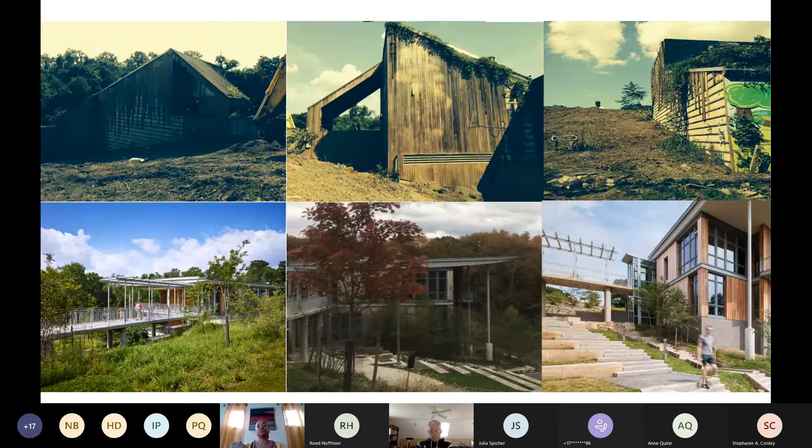One of the things we were able to do was maintain the original footprint of the building. Going back to that imperative of site, staying within the smallest footprint you're able to achieve is one of those things, and we were able to do that. So the building sits on the same original footprint, but we've actually increased the amount of space, because instead of spreading out, we have 3 floors as opposed to the original 2 floors that were on that site.

Another piece of our site is the From Slavery to Freedom Garden. The Living Building Challenge is a regenerative design process, and it was an opportunity for us to put a regeneratively designed garden within our space.

We took that a step further by not just thinking about the ecological design principles, but how people would use the space and the equitable use of the space. In this photo you can see children interacting with the garden, and that raised garden bed in the center uses a soilless media. It's an opportunity for us to teach children about how plants grow, and more importantly, about sustainable materials and why we'd choose to use them within our site.

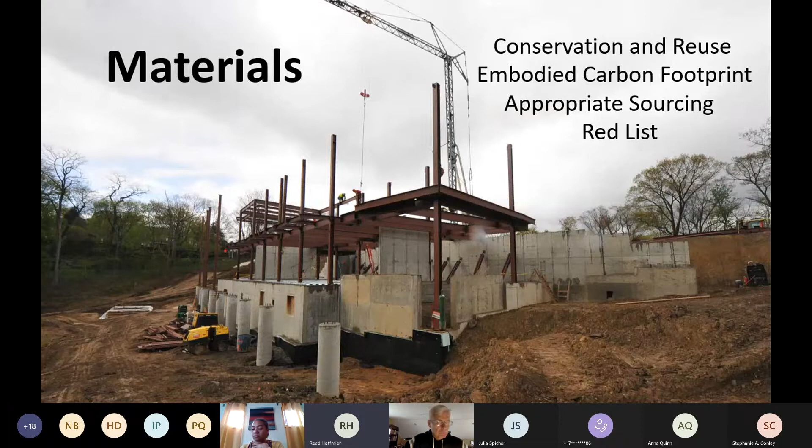Thanks, Camilla. I'll talk about the materials petal. It has a few imperatives, and it's definitely one of the less glamorous but very important petals here. First would be conservation and reuse.

Basically, boiled down, in the demolition and construction process we tried as much as possible to avoid putting materials in landfills. I'm going to go pretty quickly here since we'll have a Q&A at the end, so remember any questions you might have.

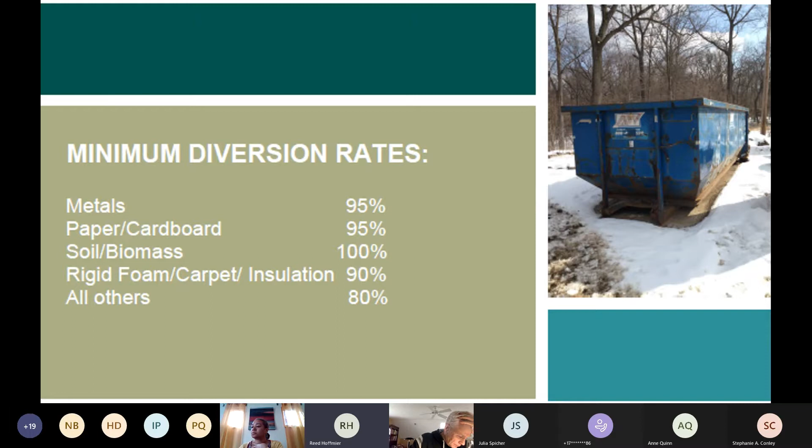But embodied carbon footprint—as much as we like to say there's minimal impact, obviously you can't build anything without having a carbon impact. So to offset that, we were required to track the carbon footprint of our construction process and purchase carbon offsets.

Another imperative is the red list. If you ask anybody involved in the design and construction process, most will probably tell you this was the most difficult part of the entire thing. Basically, we have a list of about 430 chemical compounds that are not allowed to be in any of the materials we use, from drywall to light plate switch covers—just everything.

It basically boils down to groups like formaldehyde, PVC, and VOCs. The challenge was going to all the manufacturers of every product we used and having them vet the product to confirm it contains none of these chemical compounds. What we learned in the process is that material suppliers are not always willing or able to share this information.

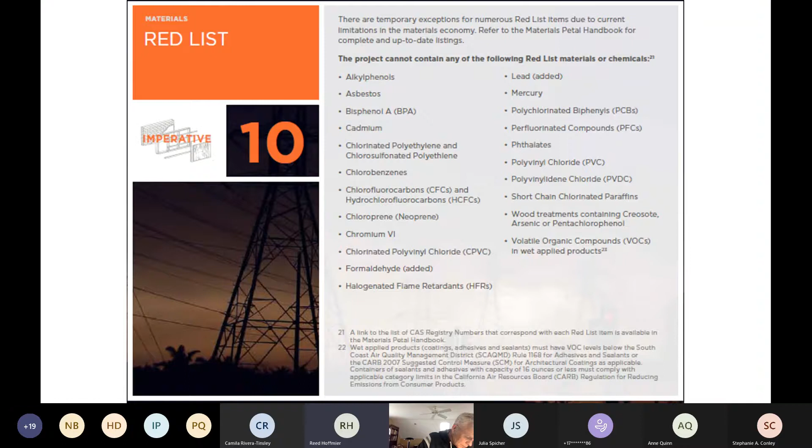It's really difficult to do, but in a way that's how we were moving the needle a little bit—looking for transparency in the products industry. You can see the difference between when we started this process and current living buildings coming through now: suppliers are more and more inclined to have this information ready to go, because there's a market for green materials. That's pretty exciting.

Another thing we found vetting those materials: natural materials are obviously going to be the easiest. Stone, concrete, untreated wood, things like that are fairly sustainable in a relative sense.

The last imperative within the materials petal is responsible sourcing. First, you have to ensure your products are being sourced responsibly—for example, lumber used has to be FSC certified. The other thing is sourcing distance: the heavier the material, the closer it has to be to the job site. For example, the stone we used on site was quarried outside of Butler, whereas some specialized electronic components may have come from Europe.

Okay, so now we're on to the equity petal. Camilla can tell us about this.

You might be muted, Camilla.

Part of the equity imperative demands that we take a look at democracy and social justice. We also pay attention to the scale of the place, a human scale and a humane place.

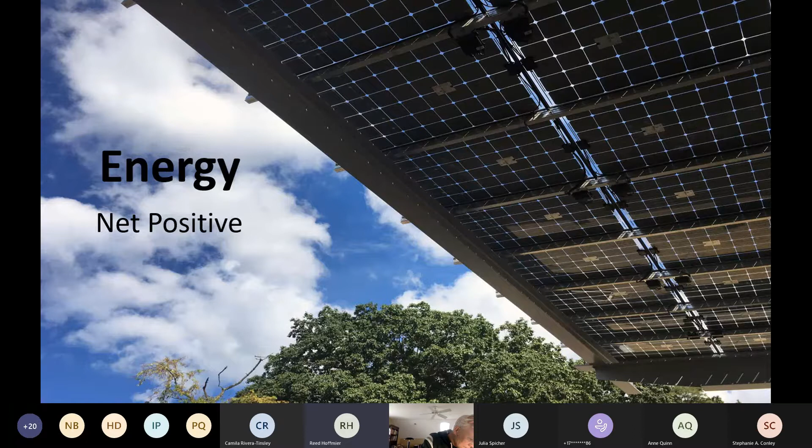All right, so the energy petal—this is a big one. There's a lot of metrics and data collection involved, even though it only has one imperative: we have to be net positive in on-site clean energy production, meaning we create more clean energy than we use.

Here's an overview of our site. On the left side, we have solar panels covering our parking lot, creating clean energy. We use the energy for the site and building, and surplus energy is returned to the grid for Duquesne Light, used in neighboring houses or wherever it goes.

We do not have on-site energy storage, so for us, the definition of net zero means that in a 12-month period, we are selling more energy to the grid than we are buying back in return.

On a nice sunny day, versus a rainy day like last Thursday, for example, we may have only created maybe 50 to 75 kilowatt hours of electricity, whereas on a nice sunny spring day we might create a megawatt of electricity, which is way more than we could possibly use in a day. So it's feast or famine with that.

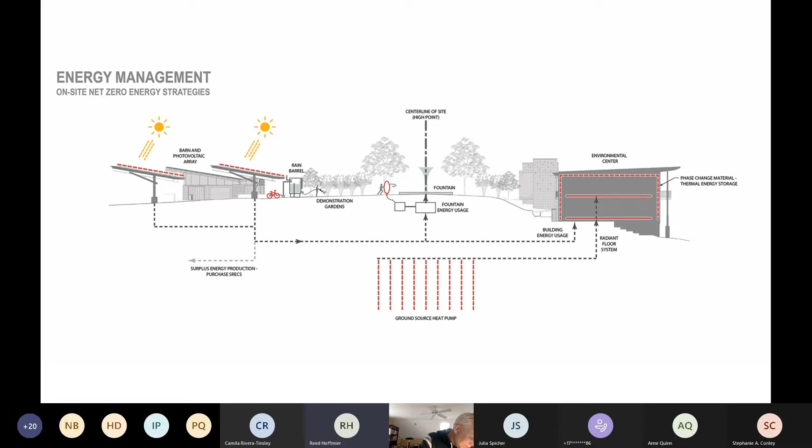On the flip side, last Thursday we also added about 4,500 gallons of water to the cistern. So there's a balance to it.

Solar production, in an average year, we're creating about 166,000 kilowatt hours, which is pretty close to what we were modeled to create—hats off to the modelers.

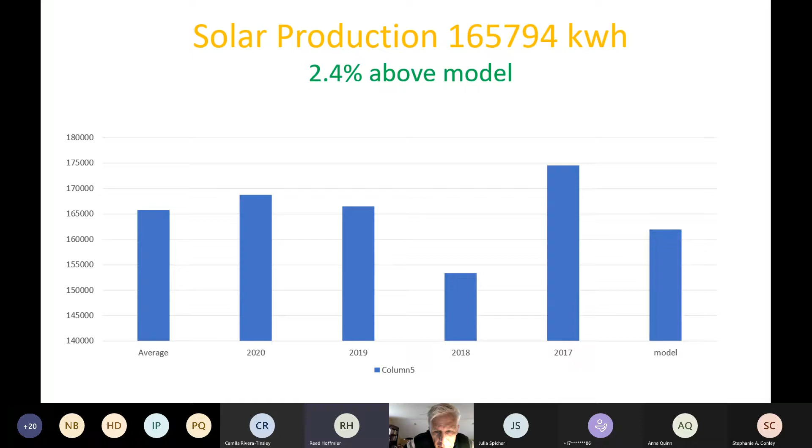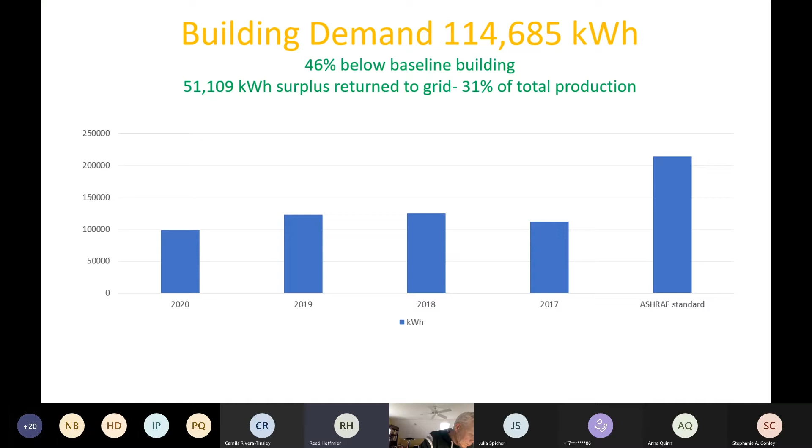Our building demand in an average year is about 115,000 kilowatt hours, which is 46% below the demand of a comparable building built to the 2008 ASHRAE standards. That gives us a surplus between production and usage of about 51,000 kilowatt hours of electricity returned to the grid—31% of our total production is surplus energy being returned.

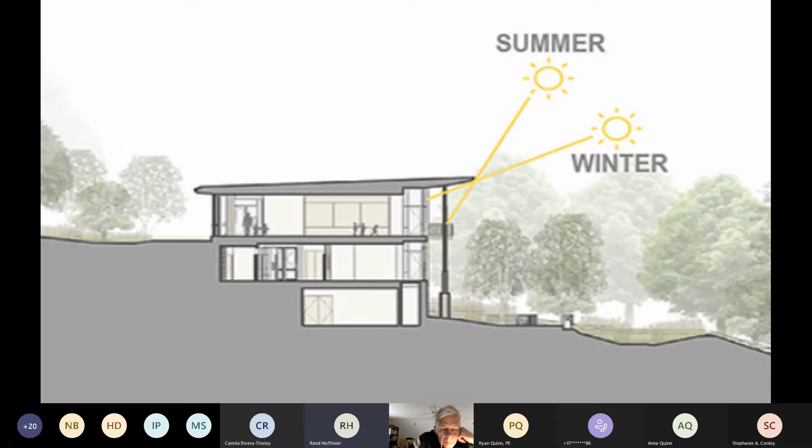On the south side of the building, we have passive solar gain. You can see that roof overhang where, in the summer months, the sun is high in the sky and the roof overhang shades our windows to help keep us a little bit cooler. In the winter months, the sun passes below that roof line, and it really heats up the classrooms and office space on the south end of the building.

Natural ventilation is another great passive design strategy. The way we face the south side with our three levels of windows, we really take advantage of those prevailing summer winds. The building is designed so that when we open the windows and we're in natural ventilation mode, we create a natural draft of air. There are automatic windows that open on the north side, over top of our stairwell, that create a heat stack which pushes hot air out of the building while bringing in fresh air from outside.

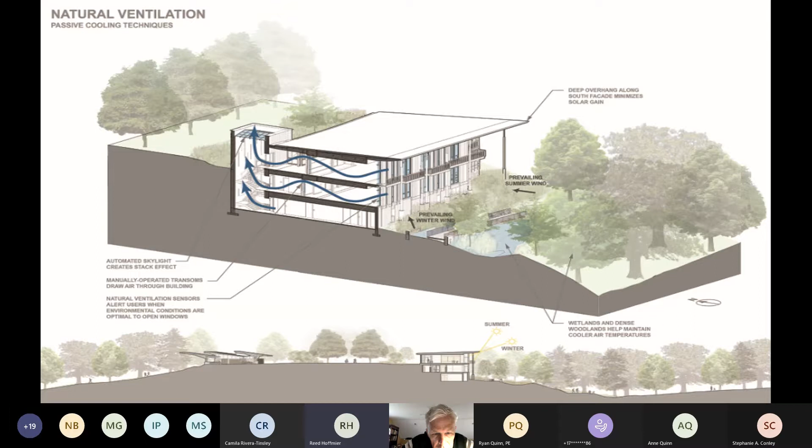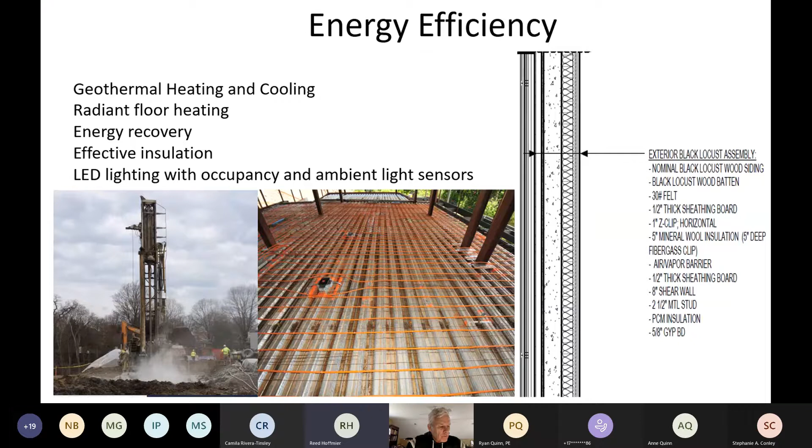Some mechanical strategies that we use: I mentioned the geothermal heating and cooling before with our ground source heat pumps. We have radiant floor heating, an energy recovery unit. You can see a cross section of our insulation on the right-hand side - very, very effective, thick walls. And LED lighting with occupancy sensors and ambient light sensors.

Here you can see a floor plan of our HVAC system. We have 11 zones of heating and cooling that all have their separate controls, so obviously that's an efficient strategy there.

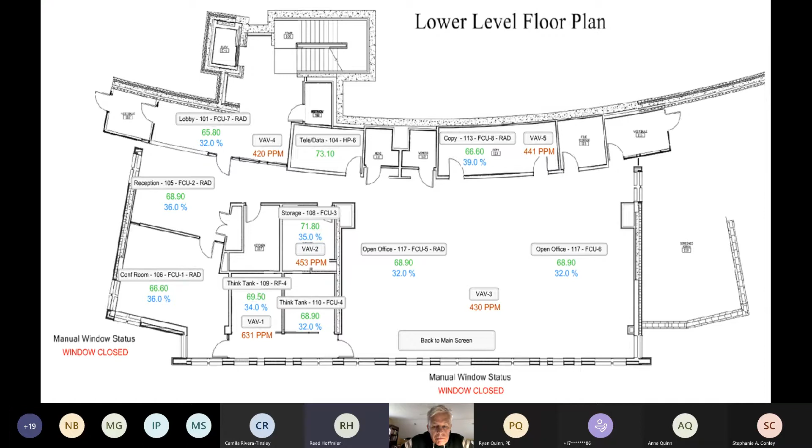We're also monitoring CO2 and humidity in each of these spaces. The HVAC system itself is controlled by a series of set points on indoor and outdoor temperature, humidity, CO2 levels, this and that. It's all fairly complicated, running through a building automation system, but it's pretty simple from a building occupant's standpoint.

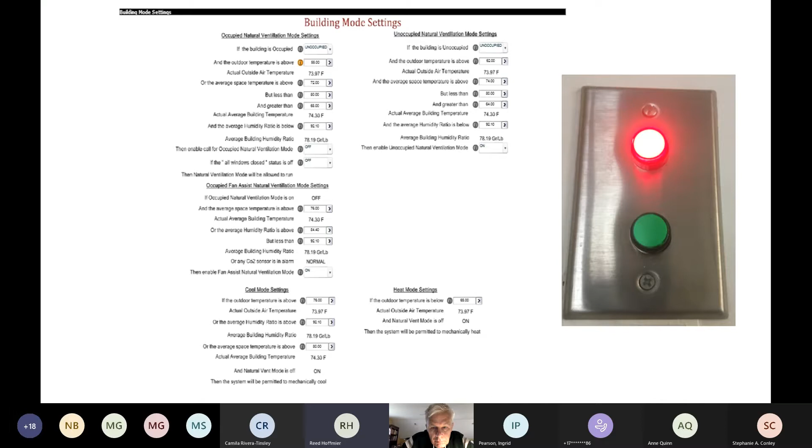Basically, if you're in the building and that red light on the right side of the screen is on, that means the building wants to be in mechanical heating or cooling mode - please close the windows. If the green light is on, that means conditions are right for natural ventilation mode - please open the windows. That's all we have to know.

All right, Camila, would you like to talk about the health petal?

Sure. So the health petal - the different imperatives under the health petal, as you can see, are civilized environment, healthy interior environment, and biophilic design.

Civilized environment really means that every single person within that building, if you are an occupant of that building - so that means folks that work there all the time - you have to have an operable window providing fresh air and light.

How civilized. Most of the education team feels really lucky if you're able to walk down into our offices. It is very bright, very airy, and there are a few spaces we have where we've been tempted to say, okay, why don't we put an extra desk in this space that doesn't have any windows? But we don't do that because we are adhering to this petal, which is actually really good for our productivity. If you know anything about WELL Building Standard, you know there is some crossover between living building and well building.

Another imperative is a healthy interior environment. Reed talked about this a bit in the previous slide - that has to do with interior air quality. We have a really reactive ventilation system that goes back to that red and green light diagram you saw. The reason I like that system, as an educator and as director of education, is I really pay attention to how people are using the space and what they're learning from it.

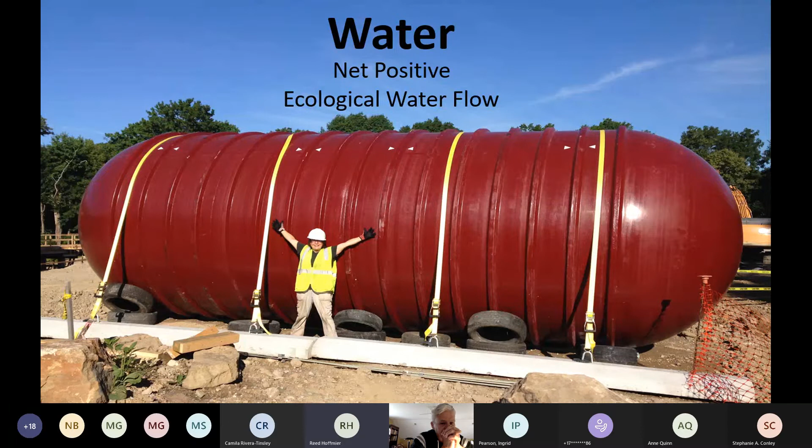The two imperatives with water are we have to be net positive in water, just like with energy, and then we have to be conscientious of the ecological water flow. So here are our water management strategies for our net zero water strategy.

Basically, we are collecting rainwater that falls on top of the solar panels as well as the roof of the barn building, and those are being collected in the cistern you saw on the previous slide. That's a buried cistern, 15,000 gallons, as well as a few above ground rain barrels that we use for the produce gardens. So that captured water is being used for the toilets, the fountain, and irrigating the produce garden.

Some of our low flow strategies, I had mentioned before how the fountain has a small jet with a really shallow reservoir, just low flow fixtures, standard stuff there. I have some numbers towards the end, but I think we're using an average of about 370 gallons of water per day, maybe a little more when we're using the fountain.

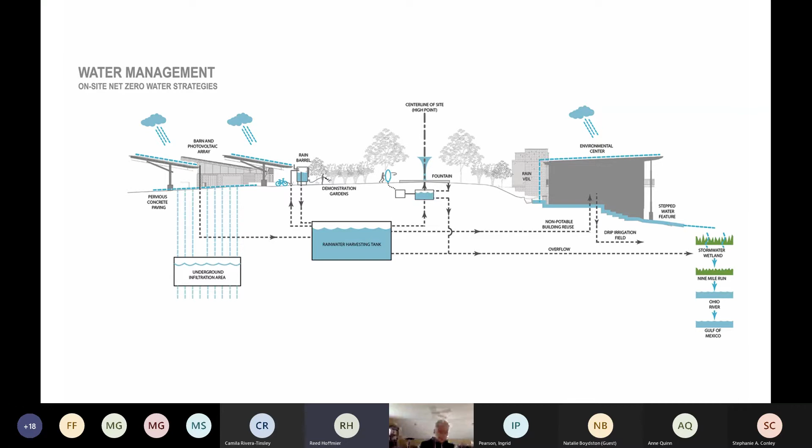So Camila, can you give us a brief overview of just where we sit on the watershed? Yeah, sure. So this will be important for folks here.

One of the things that the building is able to do is protect a first order stream that is sitting just below the site there. Thank you, Reed. So you can see that elevation.

There are not very many first order streams left within our older cities. I come from Philadelphia originally, and I worked at another center that had only 2 first order streams in the entire city. So I find it interesting that I'm back in that same space.

And the design of the site, the main area, is actually breaking up into what I would call micro watersheds. On the top side of that watershed, that water is flowing in and being managed. On the other side of that watershed, it is being celebrated.

That means you're able to see that rain coming through that rain ravine, through the rain veil that I spoke of, and then it goes into a constructed wetland. That wetland is holding the water back and making sure that nature can do what it's supposed to do, which is to clean the water, slow it down so there is a nice slow release back into the environment.

I really like this feature because it is important now as we're dealing with climate change and different climate issues. Pittsburgh and Philadelphia and other cities across the United States are experiencing huge storm events, and we really have to pay attention to what is happening to all of that storm water.

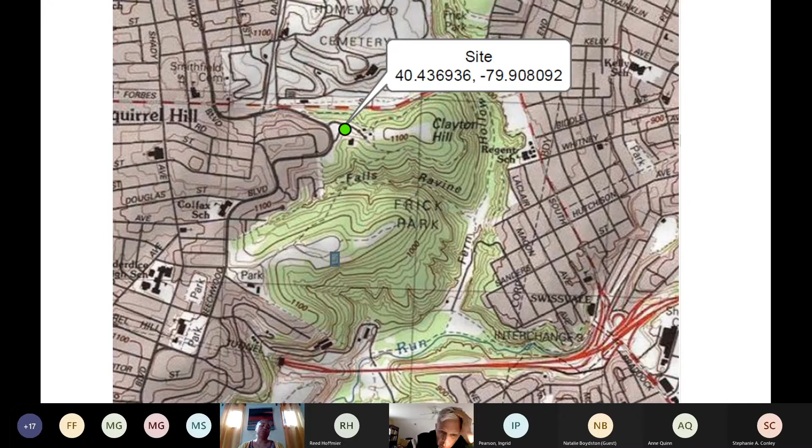As part of the water petal for the Living Building Challenge, we are not connected in any way to the city sewer system. So you can see here on this diagram, this is our on-site wastewater treatment system. It's basically a glorified septic tank.

We have a two compartment, 1,500 gallon septic tank where the bacterial processes do their thing. Then it transfers into a dual chamber recirculating sand filter you can see on the bottom right of the diagram. The water sprays through that a few times, and then it is gravity fed through an ultraviolet light at number 3 in the photo.

Then it gets stored in a 2,000 gallon dosing tank at number 4, at which point it's pumped out at regular intervals into a shallow drip field out into the woods.

As far as the on-site wastewater system goes, the amateur economist in me can't help but wonder if that money might have gotten stretched a little further somewhere else. We're only putting about 350 to 370 gallons a day on average through this system. So that's something for other people to think about on the next project.

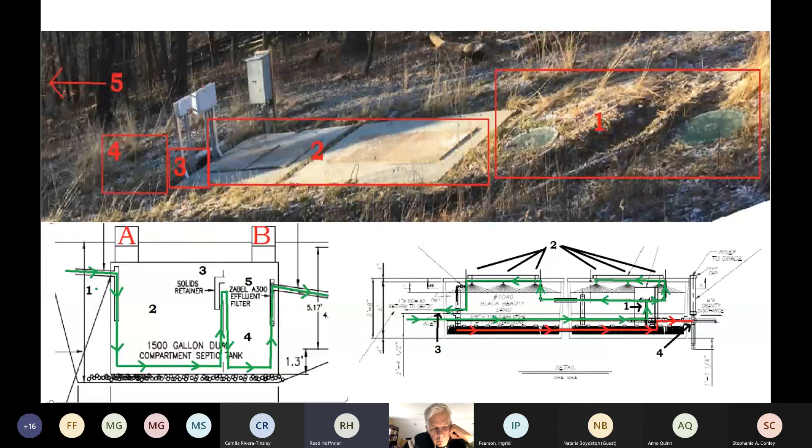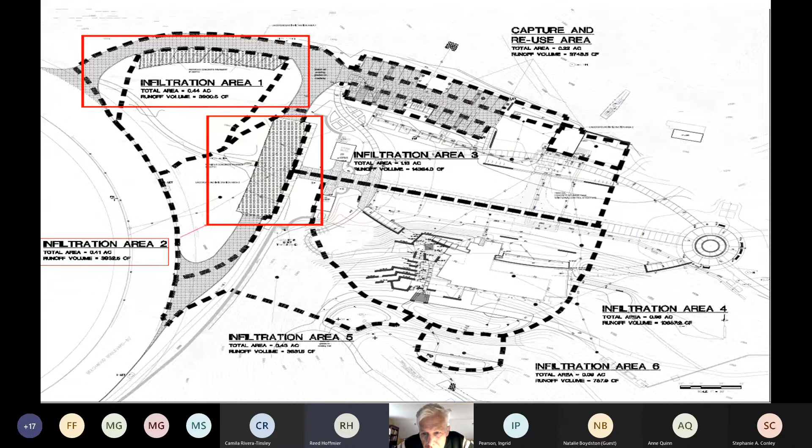We also have an infiltration bed that we'll look at a little more on the north side. Then on the south side, as Camila mentioned, we're really celebrating water. We're trying to responsibly get that water back into Falls Ravine and Nine Mile Run, so we can see some of that a little more.

As part of the beauty petal, this is our rain veil. We have a gutterless roof, and this is an intentional design where during a rainstorm, you can see this sheet of water coming down in front of these big gallery windows in the public space of the building. Really a beautiful sight to see.

From there, it goes down some water steps into the rain ravine, which is that carved sandstone sculpture created by Stacy Levy. You can also see the drain there on the left side of the screen. When our 15,000 gallon cistern is full, all the overflow that we capture off the solar panels comes out that drain and ends up going down into the rain ravine. So in the spring and summer, that cistern stays pretty full a lot of the time, and during a good thunderstorm, this is the place to be in Pittsburgh.

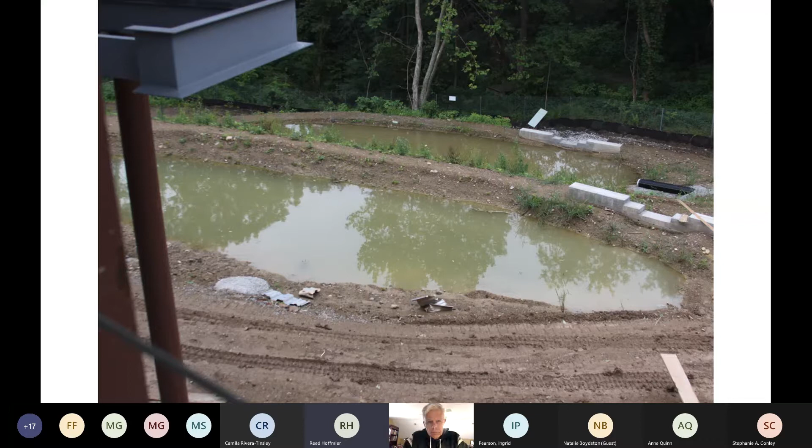So that water, the rain ravine, continues down along the side of the building and ends up in a series of constructed wetlands. They are much more beautiful than this now due to some carefully chosen native vegetation, but they're easier to see during the construction phase. We have one wetland up top, and another one off screen to the right, and both of those feed down into a third wetland at the bottom, which eventually drains down into Falls Ravine, where it's responsibly introduced.

So all that stormwater from the cistern overflow and the roof of the building coming down the rain ravine goes into these wetlands, as well as from other points of the southern landscape. There are various collection spots on the landscape that are also fed into these wetlands, so we are controlling the flow just so we don't wash out the stream.

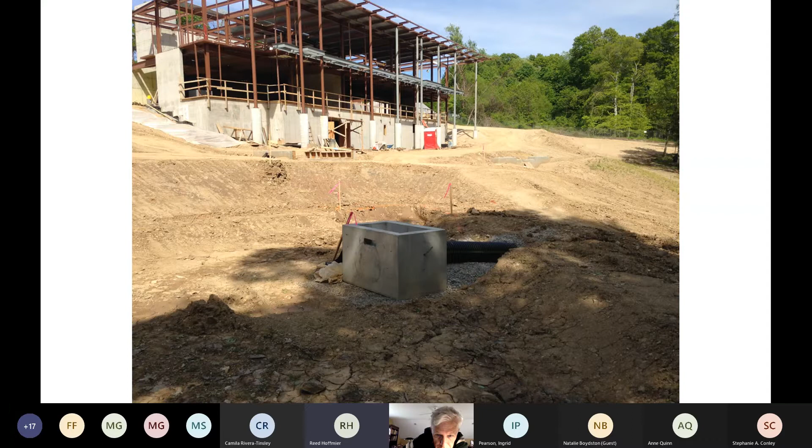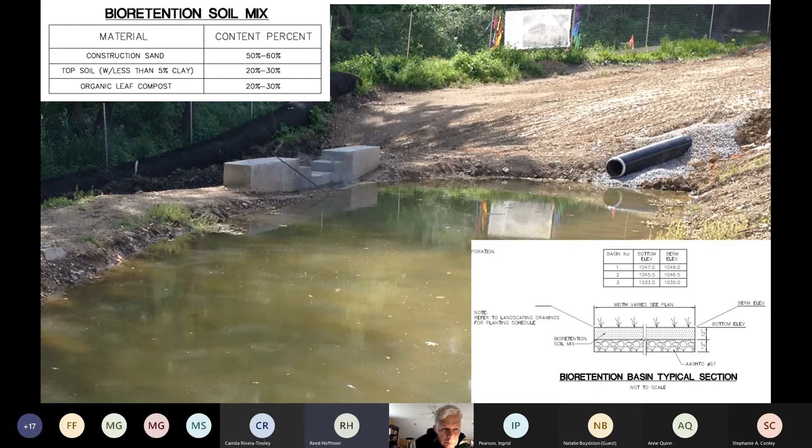Here's another shot there. I just put in a couple little extras, just intentional design with the soil mix and the plant selection.

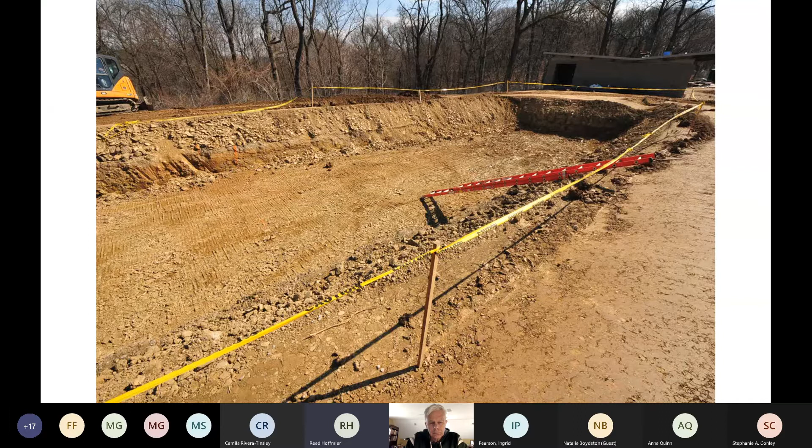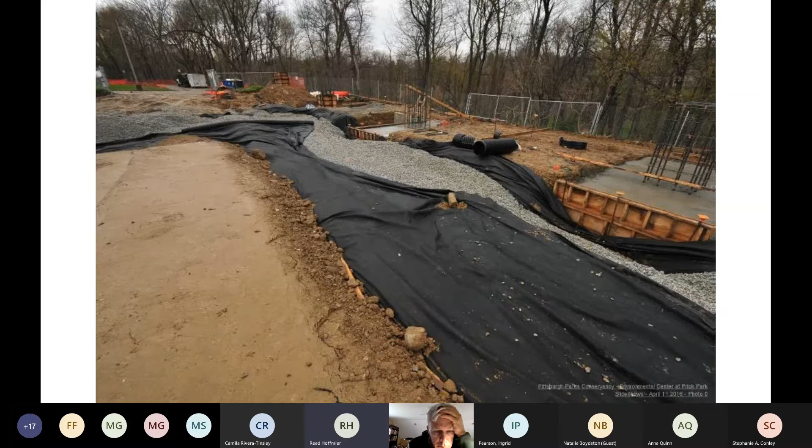This is below our solar panels, before construction, where we were creating an infiltration basin. This is on the north end of our grounds where I told you we had that compromised watershed we're really trying to protect. So we put an infiltration basin under the parking area. That's pervious asphalt we have there, as well as a little bit of the driveway that has some impervious asphalt too. So we have various collection points and drainage points with inlets that go into this infiltration bed, where it slowly gets released back out into the woods.

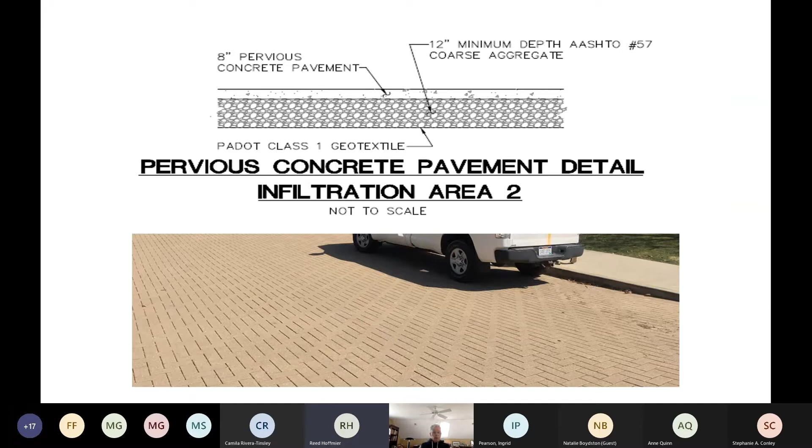Our permeable pavers from the driveway are another technique we used. We have two areas with permeable pavers. The first area is right in front of the main entrance to the park, with about a 12-inch infiltration bed below our 8-inch pervious pavers. Our other area has, I think, a 24-inch infiltration bed, and I think that basically comes down to the differing soil qualities between the two spots.

Here's one design oversight I'll point out. As you enter from Beechwood Boulevard, our driveway slopes up towards Beechwood Boulevard, and then it's a continued uphill slope for about a quarter mile. When it rains, the stormwater comes down and hugs that curb on the left side of the photo, coming down unimpeded. The first thing it hits is our pervious pavers, bringing with it silt and sediment. It's kind of a shame, but fortunately it all hugs that curb on the left-hand side.

So it's not compromising the entire site, but it does make it difficult to maintain. There is some ponding that occurs on the left-hand side, even though the majority of the site is operating properly. I think if we had put in a little catch basin with a clean out here and an inlet pipe that could capture all that water and pipe it directly underneath into the gravel, that would have been a nice touch.

Data monitoring, we don't have the most accurate data monitoring for these stormwater systems. I know this is a challenge many of you face, how do you quantify these things? We do have a Hobo MX water level logger for the pervious pavers, and that took a little bit of getting used to.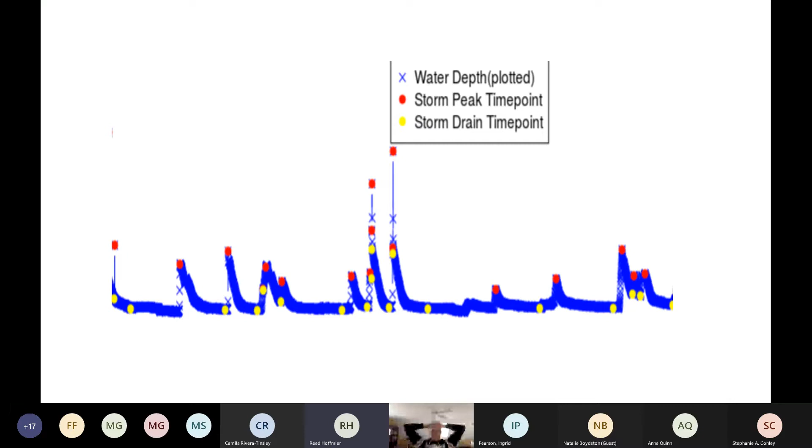They told me it was easy, but I'll never understand that world. It is amazing. It also gives us this nice graph for people like me who just like to visualize things.

So, green infrastructure, average annual results. As I mentioned, with energy, metering is pretty easy. We have meters on everything. We can pinpoint 15-minute increments for how much energy the fountain used last July or whatever. The water's more difficult, but we do have some metrics here.

The Governor's Drive, those are the permeable pavers that we are measuring with that water level logger. In an average year, we're collecting about 58,000 gallons of water with an average infiltration rate of 1.2 inches per hour. The exit drive is our other section of permeable pavers. This one does not have the water level logger, so we're just extrapolating that data based on the size relative to the Governor's Drive.

PV collection to the cistern and/or wetlands: we are collecting an average of 370,000 gallons a year. That is running off the roof of the barn and the solar panels and running through our cistern. 167,586 gallons of that is being used for the facility, so that's the water we're using for the toilets, the fountain, the produce garden. The remainder of that 370,000 gallons, another 200,000 gallons, is basically catch and release.

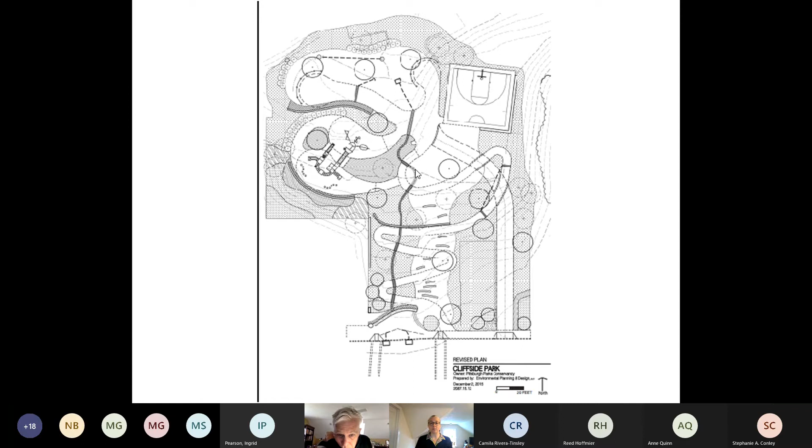You can't see the full length of it, but it goes and collects water off screen all the way uphill, and has a series of landings and drops as you go underneath the path system out to the edge of the park.

The next park I'm going to talk about is here in the southern part of town, McKinley Park. McKinley Park is within the Sawmill Run watershed.

There are two projects that are completed or substantially complete. They're both in the Beltzhoover neighborhood and are in the more northern section of the park. This was a project that was completed—I'd have to look back at my notes for the exact date, but it was probably around 2016 or so.

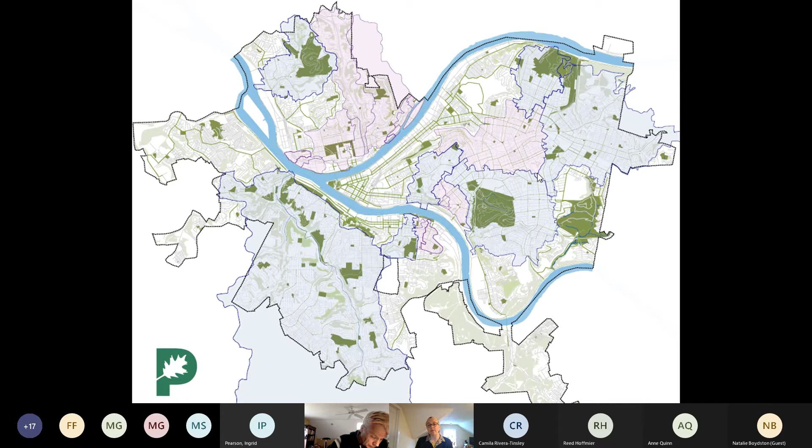And so the final place where I'll stop is here in Schenley Park to show you a couple of projects there. Schenley Park is part of the 4 Mile Run watershed.

This project was completed a little while ago now, probably 2014 and 2015. This is the Bob O'Connor Golf Course. It's in the Phipps Run watershed that flows to Panther Hollow and out to 4 Mile Run and the Mon.

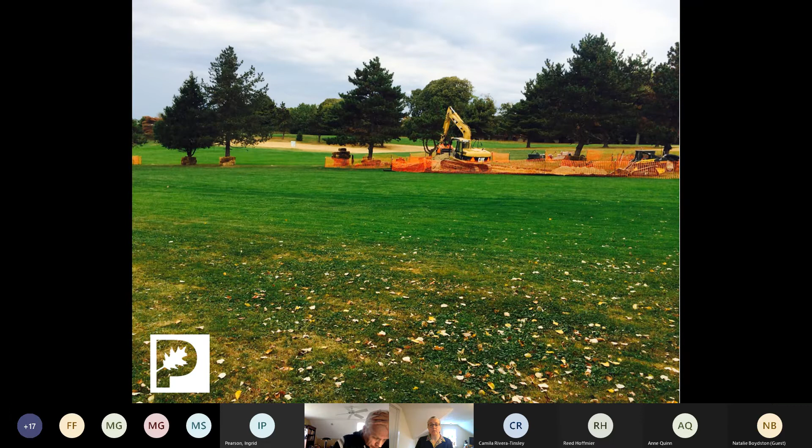Because it's such a large lawn area, it delivered quite a lot of runoff to Phipps Run, which is a small stream. So these retentive grading areas were built along the golf course in places that made sense so people could still play there, but water could be captured before it made its way down into this valley to the woods, where Phipps Run is. There were 18 to 20 or so of them installed.

Here are a couple of others. The one you saw before was up here at the top of the hill and doesn't actually capture as much water. But these ones at the bottom of the hill, because there's more land area draining to them, capture much more water.

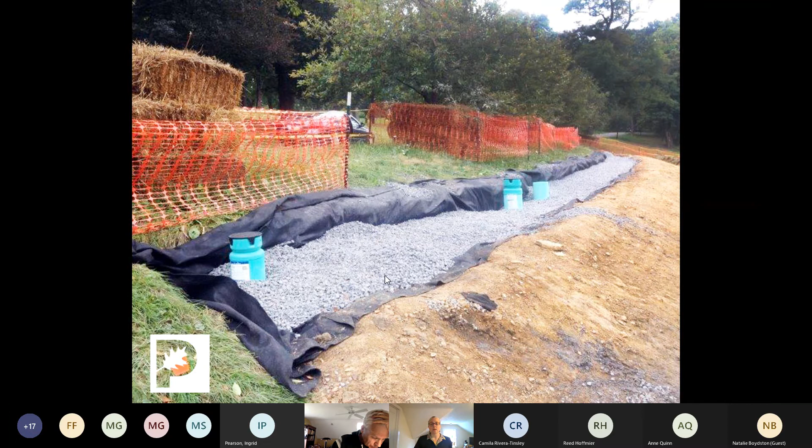Finally, in another section of Schenley Park, close to the Bartlett Playground, there were infiltration trenches, a meadow, and a level spreader installed. This is Beacon Street here in Schenley Park. New inlets were constructed to deliver stormwater to these infiltration trenches, perforated pipes buried in rock that infiltrate water below the land surface. This is what it looked like soon after construction.

And this gives you an idea of what you could walk through now, although this is a couple of years ago. This image is from where Beacon Street is up here to the left, and the infiltration trenches are underneath all these native grasses, so you can walk through this meadow.

But I'll say too that walking through this meadow is a little different now because maintenance is such an important piece of all of this work, and our staff works diligently to manage invasive and non-native species, specifically Canada thistle in this meadow. It's not an easy plant to manage, and there have been changes over the years in what tools can be used. Our team has moved to mowing, and we'll probably add some shade trees as well to try and shade out that specific plant. Sometimes you'll see swaths of the meadow cut so that Canada thistle doesn't go to seed while it's growing.

With that, I just wanted to provide a little bit of context of some other projects that the Parks Conservancy has done in Pittsburgh.